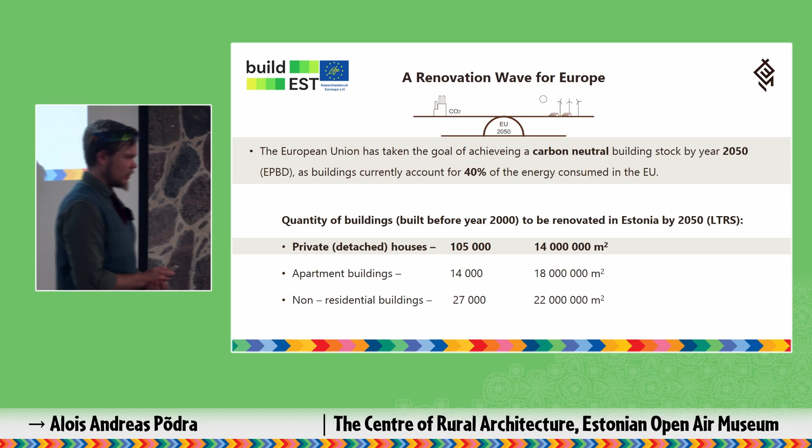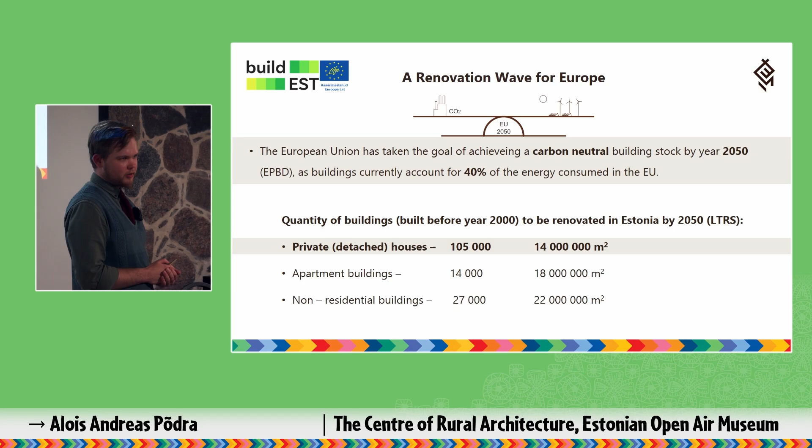First, a bit about energy efficiency. As we all know, this entire conference is framed somewhat around this. The European Union has taken the goal of achieving a carbon neutral building stock by year 2050, as buildings currently account for about 40% of the energy consumed in the EU. For this reason, each member state was asked to compile a long-term strategy for building renovation.

And these are the numbers laid out in the Estonian legislation. We see that private, or single family, or detached houses, however you want to call them - I will be referring to them as detached houses - have the lowest number in terms of total area of the building stock, but in absolute numbers it is several times larger, which is quite obvious here.

Which means that we have a lot of detached houses to renovate, and we have also considered that a number of buildings will be falling out of use, some are renovated, but the total number we have arrived at is 105,000 detached houses. My presentation was centered around non-listed buildings.

However, I will be going more in depth in terms of dwellings. So I will be leaving out buildings with a public function and buildings in more urban areas. I will be focusing more on detached housing in lower density areas.

So in Estonia, a renovated building ought to comply with minimum standards for energy efficiency, which in Estonia means energy class C, meaning the total yearly primary energy consumption per square meter needs to be between 185 and 140, depending on the size of the building. There are 3 different classes for detached houses.

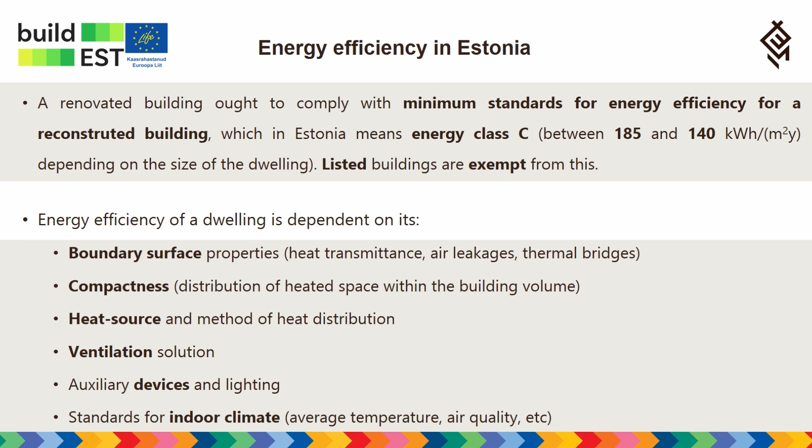We have its boundary surface properties, which affect its heat transmittance, air leakage, and thermal bridging. Its compactness - how the heated space is placed within the building volume. Is it placed all around the massing, or is it all clumped together?

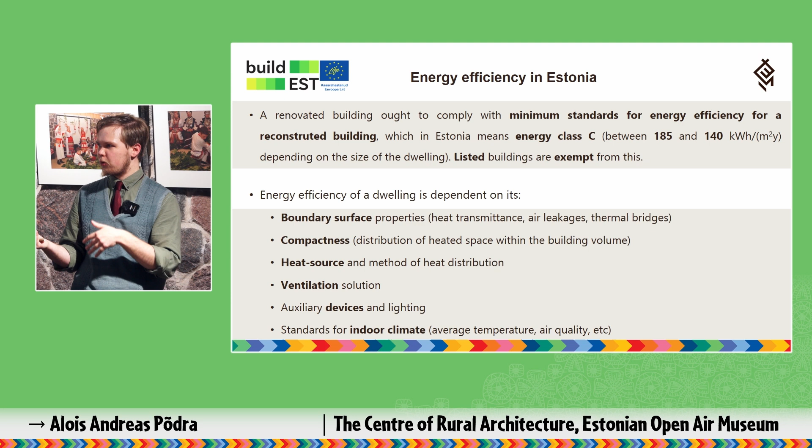The type of heat source, and how efficient it is. Its ventilation solution - is there a ventilation solution? Is the ventilation solution mechanical or natural? What types of auxiliary devices and lighting does the building use? How many of the devices are used and how efficient are they?

And what standards for indoor climate have we established? Are we satisfied with, let's say, 15 degrees as an indoor temperature during the winter months? Or do we require higher standards for this? And also that applies in terms of air exchange.

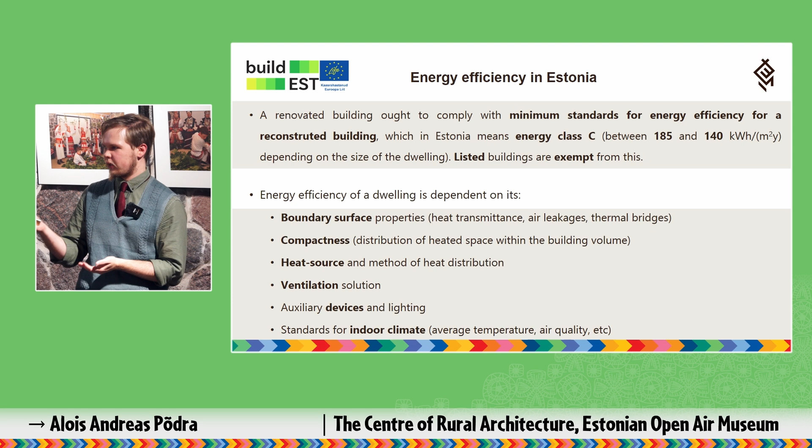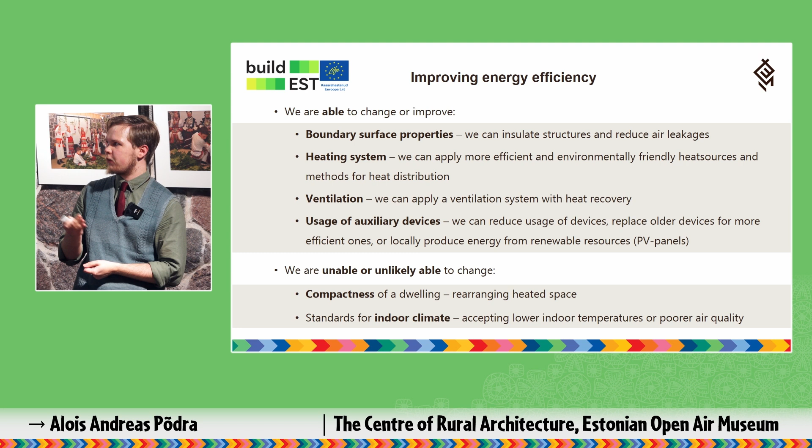So what can we do to improve the energy efficiency of a building? We can upgrade its boundary surface properties, meaning we can insulate them and reduce air leakages. We can upgrade the heating system, applying more efficient or environmentally friendly heat sources and more efficient methods of heat distribution.

Ventilation - we can apply a ventilation system with heat recovery, because if we need to reduce air leakages, that means any form of natural ventilation needs to be switched off, and all ventilation needs to be done mechanically. But that also gives us the opportunity to use heat recovery.

And the question of how many and what types of auxiliary devices do we use? Do we use more devices, less devices? Do we upgrade their efficiency? Do we replace older devices with more efficient ones? And can we produce energy locally from renewable resources, which is where photovoltaic panels come into play?

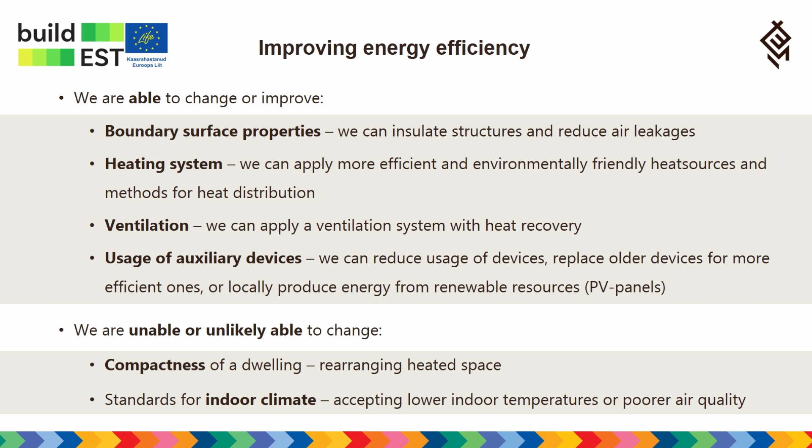What we can't, or are unlikely to change, is the compactness of our building - rearranging any heated space can be very costly and isn't really sensible in a building, usually if it's historic. And the standards for indoor climate are another area where we can't really make concessions - currently it has been established that we shouldn't make any concessions in terms of indoor climate.

We shouldn't accept lower indoor temperatures or poor air quality. However, there are points of discussion around this as well that can be had.

Now, we have looked at the energy performance side, but we also need to take into consideration the architectural quality of the renovation project, as that is not only an issue of aesthetics or heritage, but also has a quantifiable dimension in the building's life cycle.

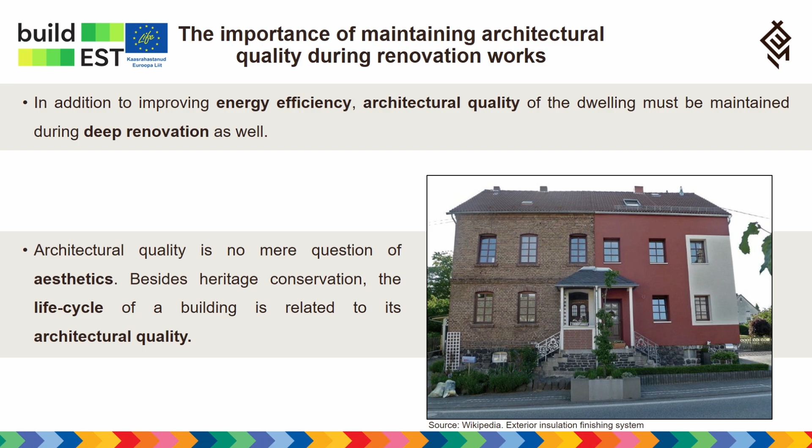So I would argue that if the renovation project begins by replacing the historical details and materials with relatively cheap modern products, they ignore the structural issues or use improper repair techniques. Sure, the renovation solutions might be fine for 20 to 30 years, but after that, the renovation will need to be renovated again.

The negative scenario is that when you're looking at the building, everything original has been lost. The building doesn't really look that good anymore. There's a lot of structural issues. And in the end, the worst scenario is when the homeowner starts to question, why should I renovate this building?

The worst scenario is when the real estate value of the plot is more profitable without the building than with it, meaning the owner is more motivated to demolish it and sell a clear plot to a developer than to renovate it. Improper renovation where the building loses its architectural character has an impact on the life cycle of the building, which has an impact on its carbon footprint as well.

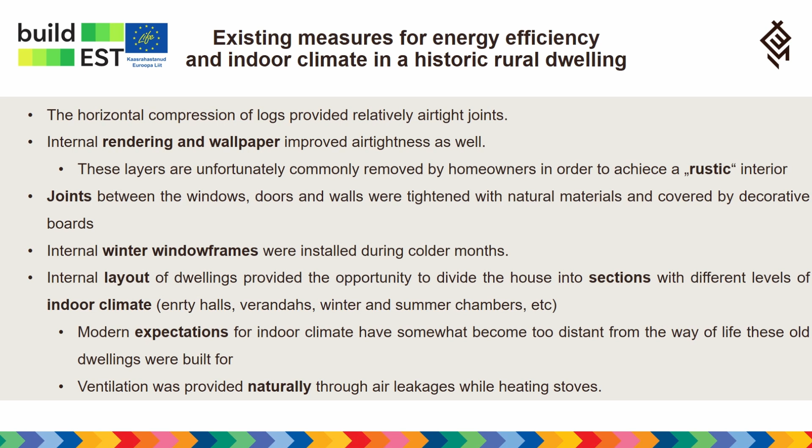This is, for example, any entry halls, verandas. For example, when in winter you open the door, it doesn't lead into a heated chamber right away. You have this sort of transitional spaces for entering the building, so that the heat doesn't escape out through the open doors.

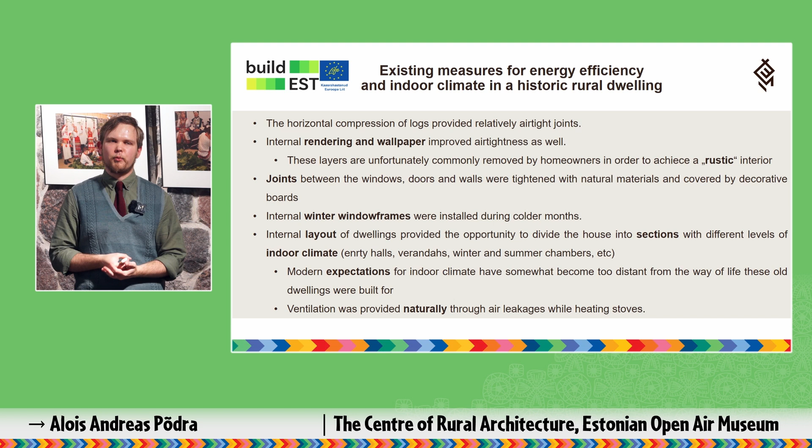And you have winter and summer rooms. Rooms that you heat during the winter, and then rooms that you do not heat, that you use only during the summer months. And also, the modern expectations for indoor climate have become somewhat distant from the way of life that these old dwellings were built for.

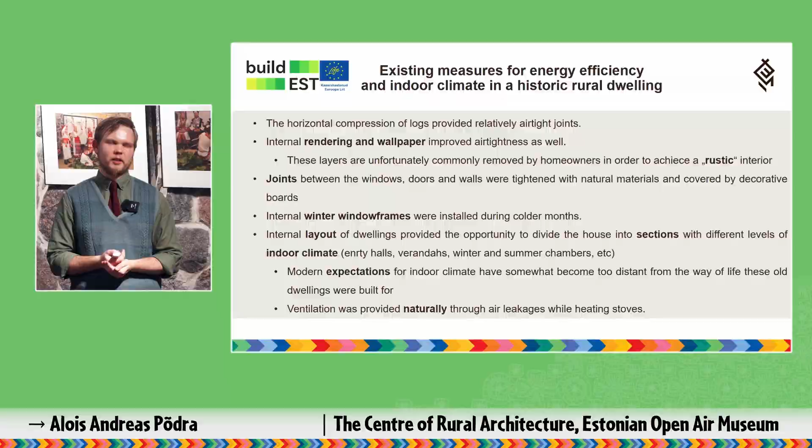Having low temperatures on the floor and putting on woolen socks and wearing an extra layer of sweaters was part of the way of life in these buildings. Unlike today's expectations that I want to walk barefoot in the house and I want 21 degrees everywhere. There is a gray area in how appropriate such requirements in a historic house actually are.

And also the aspect of ventilation was provided naturally through the air leakages in the windows, through any gaps in the doors, and it functioned thanks to heating stoves. So nowadays, when we seal the air leakages, we seal the windows, we use heat pumps, we arrive at the problem that the building isn't ventilated anymore, which leads us to the requirement of using mechanical ventilation.

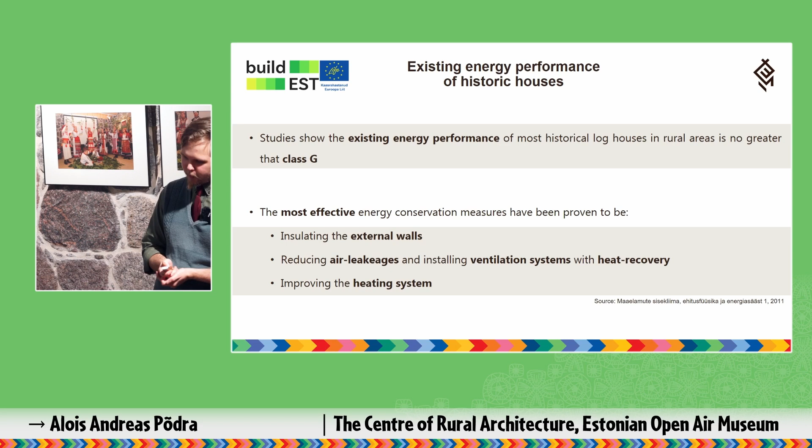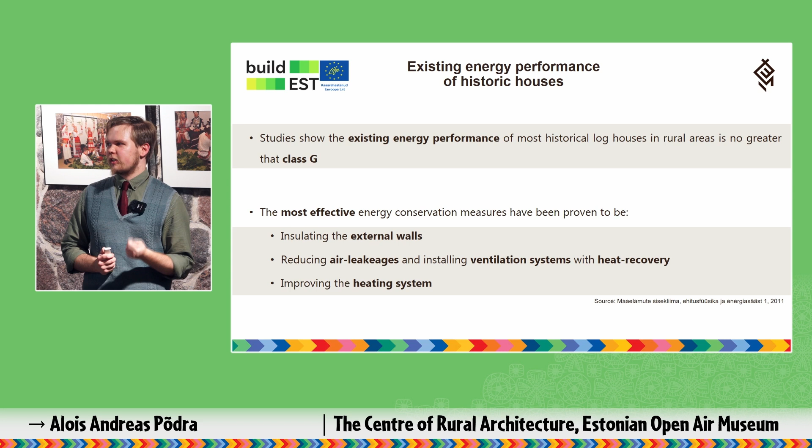In terms of the measured energy performance of such historical dwellings, unfortunately, while we can apply these sort of passive or energy conservation measures, the energy class does not go beyond class G. Studies show that the most effective measures are insulating the external walls, installing ventilation systems with heat recovery, and improving heating systems.

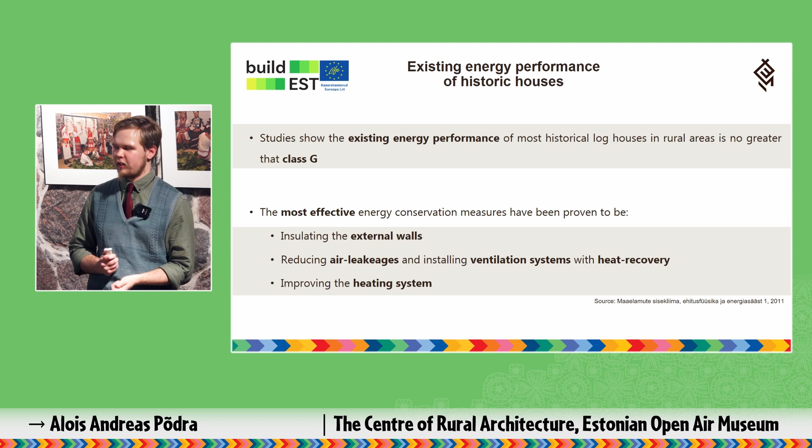Insulating the external walls is among the most controversial energy conservation measures, because there's the danger of defacing the facade with the external insulation. However, we can't really get over the fact that it is among the most efficient energy conservation measures.

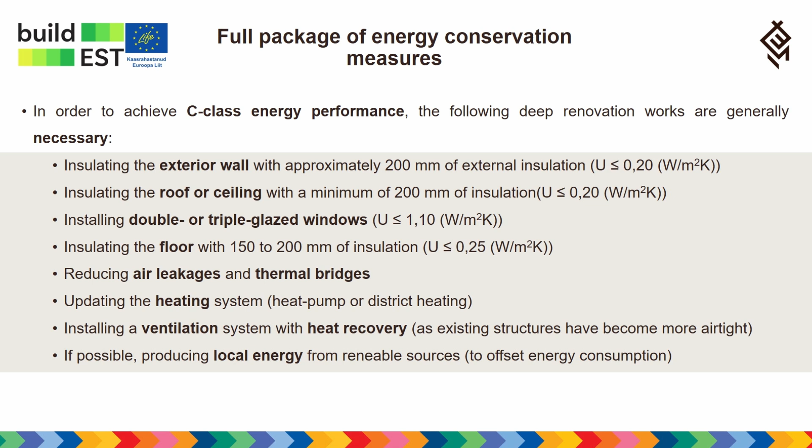And the question of internal versus external insulation: experience shows that any more than 5 centimeters of interior insulation can be problematic in terms of moisture. So it is possible that perhaps with calculations and moisture barriers and ventilation, a little bit more is possible, but the 200 millimeters that you generally need for the required energy class is not possible when insulating the interior.

However, external insulation is safe in terms of any condensation and mold, and bacterial and fungal growth.

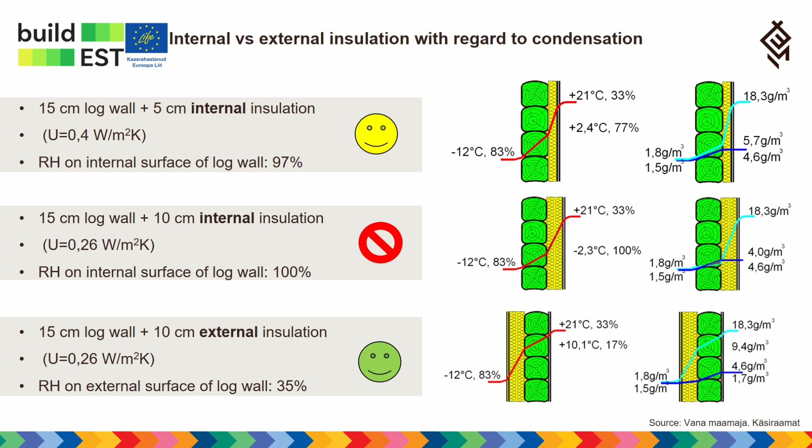And there have been studies where we have an actually listed or protected building, and there have been explorations: can we somehow maintain the proportion of the building pre-renovation while adding insulation with equal means throughout the entire dwelling? For this example building in Võru, they did achieve this - the external silhouette of the building remained exactly the same, although the added insulation thicknesses are also up to the required amount.

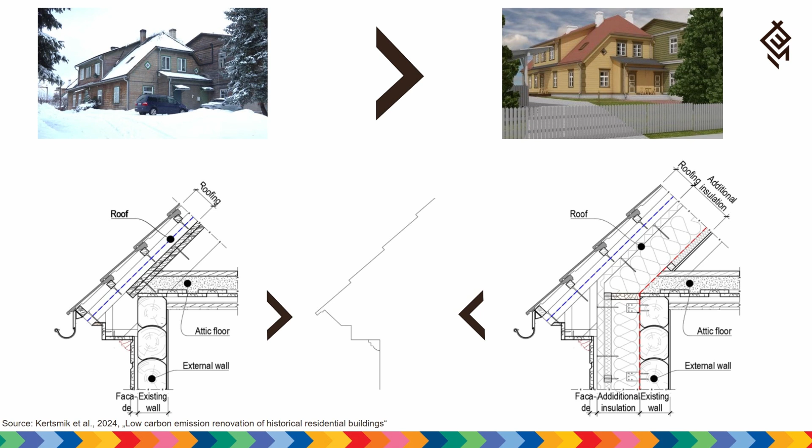So experience shows that if it works on listed buildings, there is potential that we can potentially apply it for unlisted buildings as well. However, we can't underestimate the cost of such a renovation project.

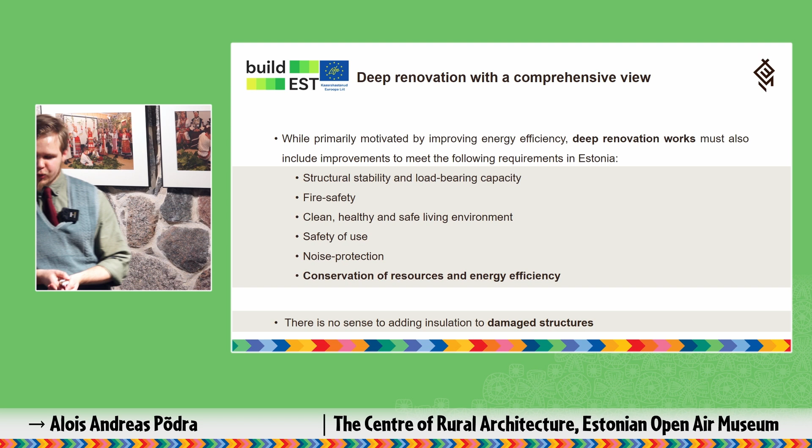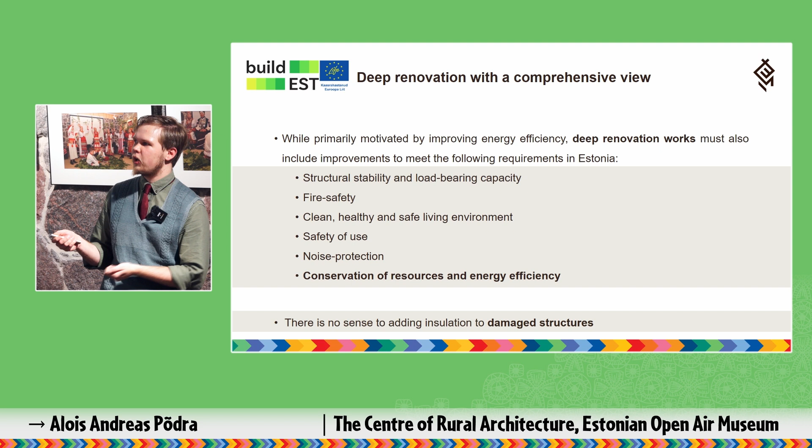Renovation works, while they may be motivated by raising the energy performance, deep renovation works must also include improvements to meet the following requirements in Estonia. We start with structural stability and load-bearing capacity, fire safety, having a clean, healthy and safe living environment, safety of use, noise protection, and then number 6 is conservation of resources and energy efficiency - which means that works on energy efficiency should also ensure that the structure or dwelling as a whole also meets these requirements, which makes the renovation project even more complicated.

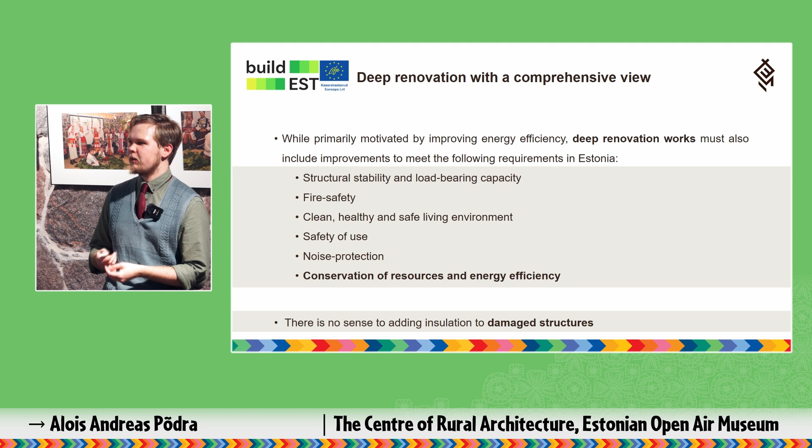And the main idea is that there's no sense in adding insulation to damaged structures, which means that we also need insights into the technical condition of the housing stock in Estonia, before we talk about any energy conservation measures and adding insulation.

So we have done several studies in Estonia to explore this question, to understand what homeowners are currently doing, what they have been doing, what they are planning to do, and what is their mindset. I will be introducing roughly 3 studies, or different aspects of each study.

The first study had a fieldwork method where a number of buildings in the Esna and Kareda region in Estonia were inventoried. There were 2 types of buildings generally: log houses built between 1900 and 1939, and then Soviet era, more modernized architecture from the 1970s to the 1980s, built from aerated concrete. So we had these two different building typologies that we were able to compare.

The rundown of the different building types: log buildings, we had 29 detached houses, 6 more archaic barn dwellings, 2 modernized barn dwellings, and 73% of these buildings had permanent residents and were used year-round, which means insulation and energy conservation measures were very important.

However, 27% were in use for limited periods, for example as holiday homes. And for those owners, renovation generally entailed was described more as repair and maintenance rather than adding insulation.

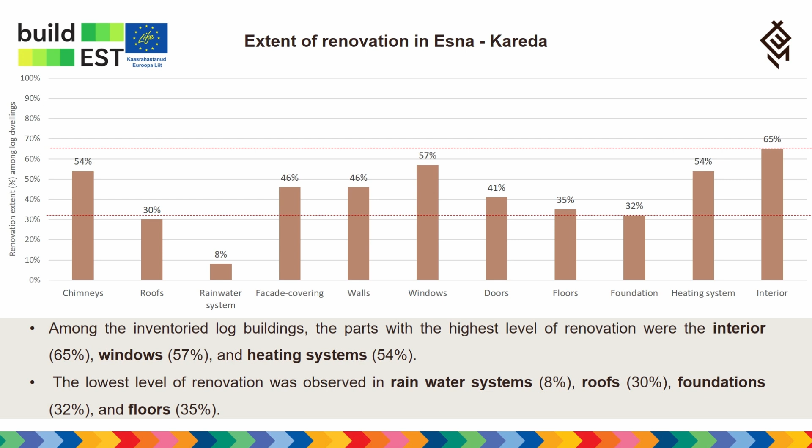There's probably this sort of trend in terms of renovation practice: insulate the walls and the windows and the roof, and replace the heating system. Perhaps renovation of foundations is just not that common a topic of discussion between homeowners.

We also noticed that renovation is generally done in stages, meaning homeowners phase out their renovation works into manageable steps they can imagine. They do it by building section, by room, by facade, sometimes even window by window. And the reason windows, the interior and heating systems are the most common is that their poor condition is likely the most noticeable on an everyday basis.

If you live inside a room, you notice if the wallpaper is poor, you notice if the window has a draft, you notice if your heating system is poor. So this is likely why these are the most commonly renovated aspects of the building.

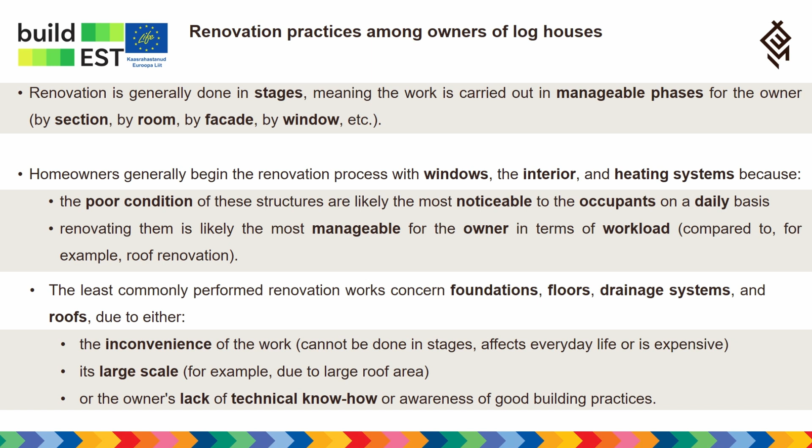However, we know the actual energy savings from renovating a window are actually not that noticeable. In terms of thermal comfort, sure, you might have less drafts during winter, but in terms of total energy performance, it might not be that great. It depends on the building, how much window area it has, how poor the original windows are, but it is not among the most efficient energy conservation measures.

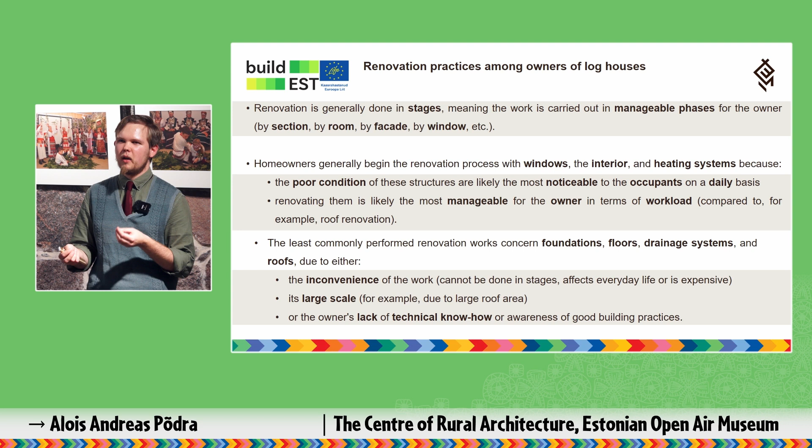And doing the interior is just aesthetics, basically. Again, while the foundations, floors, and roofs are the least done, the work is likely very inconvenient. You can't really replace a roof in stages - well, you can, but it's difficult. And renovating floors, you can't really live inside the room if you need to replace it. So if you don't have enough space for the family to move out of one room into another, then it might not be possible to renovate the floor.

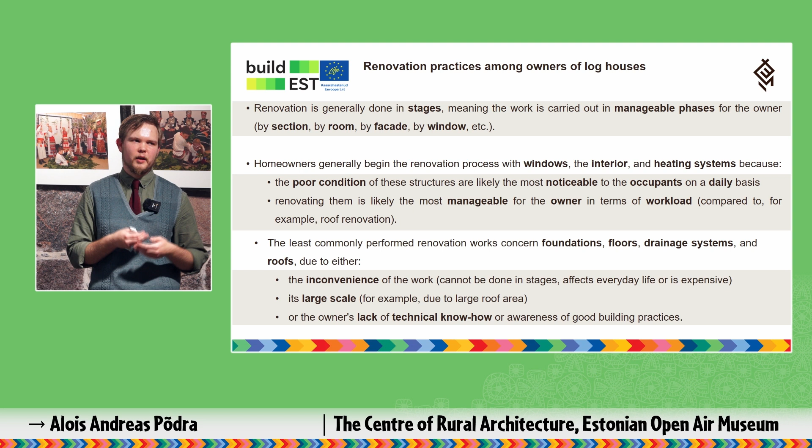Also, the owner's lack of technical know-how or awareness of good building practices is an issue. There's very much this culture of self-building, or consulting relatives, friends, neighbors, and building forums online about which kinds of energy renovation measures are the most proper and which materials to use. There aren't really that many technical, trustworthy information sources available today yet in Estonia. We are improving that, but a lack of technical know-how is a real issue.

And when comparing it to the other building typology, the aerated concrete buildings from the 1970s and onwards, I can say that their technical condition was better.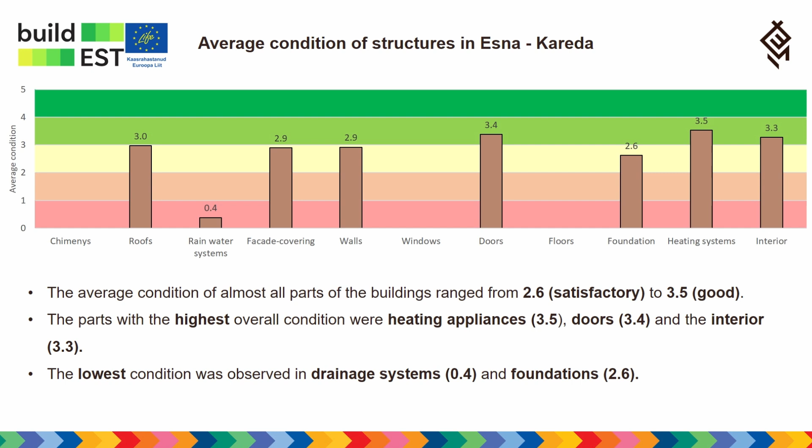In terms of log buildings, the highest overall condition was found in structures that were most commonly renovated: heating appliances, the interior, and doors. The lowest condition was noticed for the least renovated structures, again foundations and drainage systems.

Also comparing unrenovated and renovated average conditions, we see that the condition does improve. However, no average condition reaches the optimal state. And again, comparing to aerated concrete structures, they were much more closer to the perfect score than these historic log dwellings.

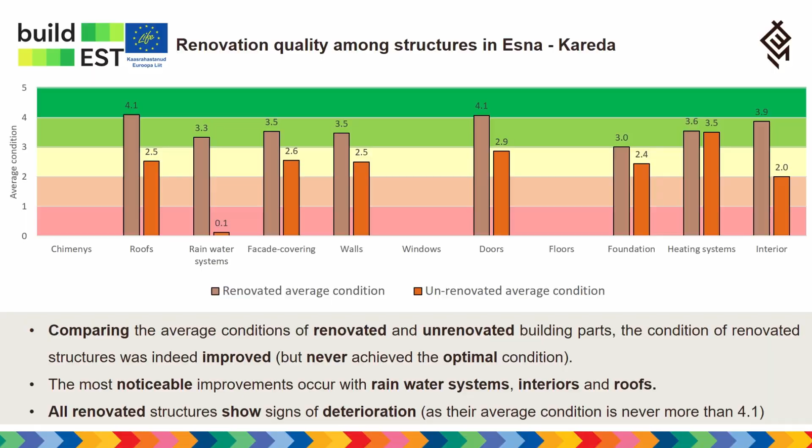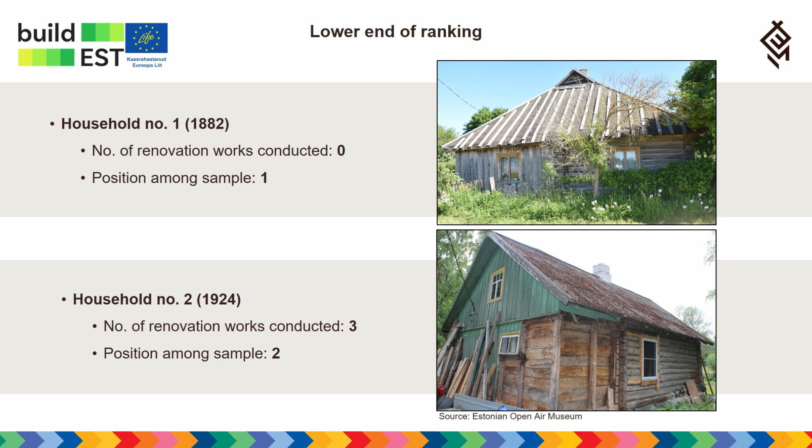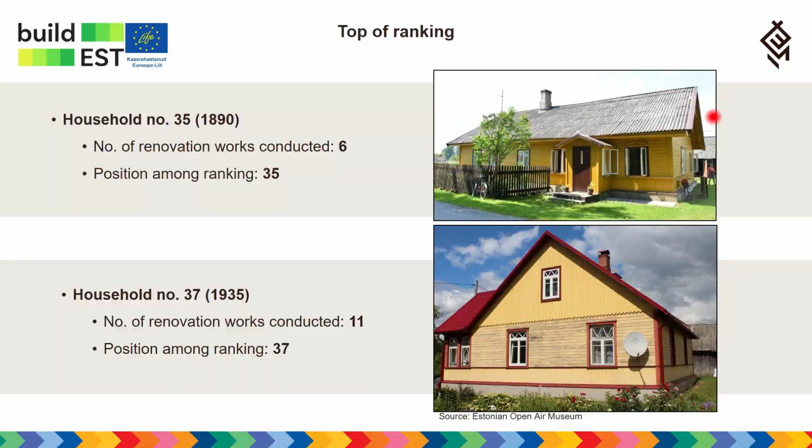The top of the ranking was interesting. We have 2 buildings with a comparable total score, 35 and 37, but the number of conducted renovation works differed - doubled, in fact. This building had 11 structures renovated, this one only 6, but the technical condition was basically the same. This led us to a conclusion: maintenance, preserving existing structures with yearly upkeep, is actually comparable to a condition where the building was allowed to deteriorate and then improved through renovation works.

But this is only in terms of technical condition, not energy performance. This homeowner likely achieved a good condition with a smaller total investment compared to the other building, which again highlights the importance of maintenance.

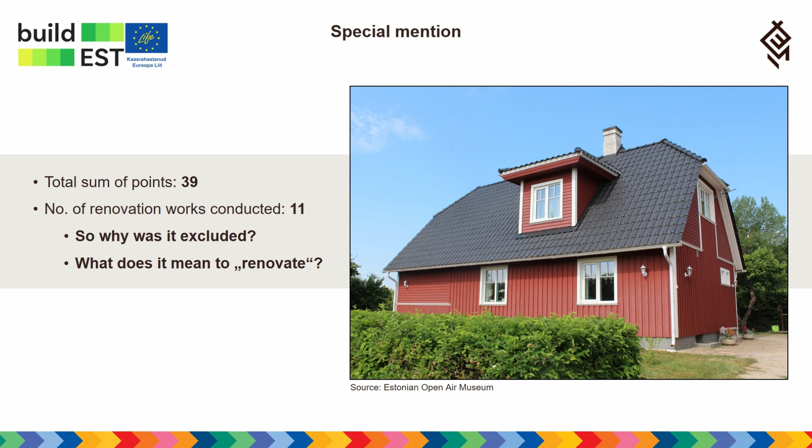One special mention had the highest score and highest number of renovation works, but it was excluded from the sample. Why? Discussions with the owner revealed that for them, renovation meant demolishing the entire thing down to the foundation and building a replica. So technically we can't call this a renovation, but it's how certain homeowners interpret the renovation process.

We also see this among developers and people who have the finances to build an entirely new building - renovating faulty structures while improving energy performance and architectural appearance becomes so costly that demolishing the structure becomes easier. Again, it comes down to maintenance, because in terms of total cost, if a building is not maintained and improvements are needed everywhere, this demolition scenario becomes far more likely for the homeowner. And this is not what we're actually looking for in the renovation wave.

And in Esna Kareda, we also looked at the amount of preservation of cultural heritage: inventorying surviving original material, the form and massing of the building, and the architectural details. We noticed that in terms of material and the form of the building, it was relatively okay. However, details are the most vulnerable of these three categories, because they're the easiest to remove, the easiest to replace, and the least likely to be placed back onto the facade once any external insulation has been placed.

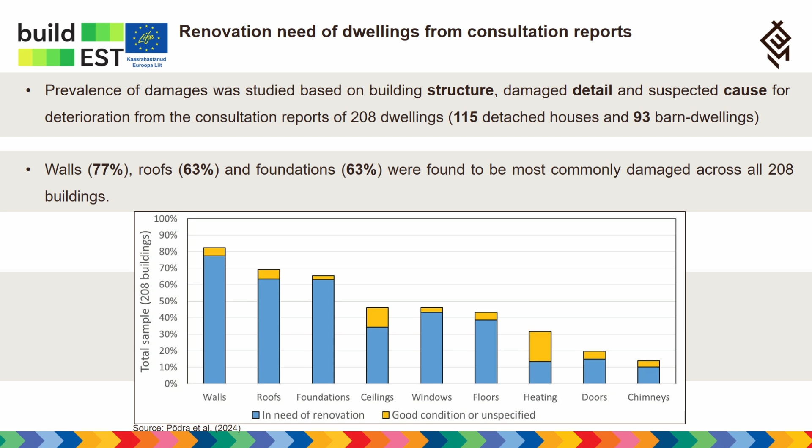Sometimes damage wasn't even described, because the reports also highlight if a structure was in good condition, or if it had specific heritage value that the homeowner ought to preserve during the renovation process.

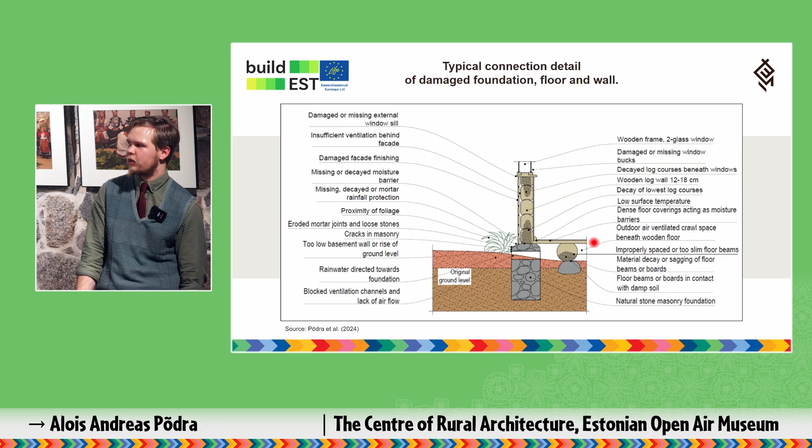We also mapped out the different damage types. As you can see, we have a simple junction between the foundation, the floor, and the log wall, also a window, and the list of damages or potential risky solutions is very long.

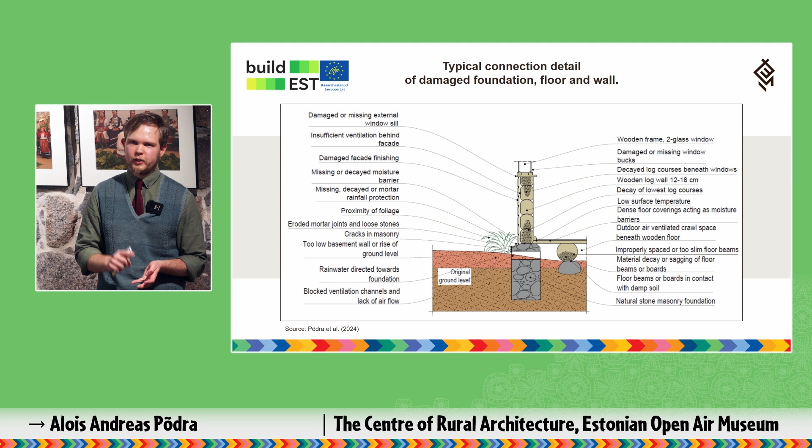The potential for damage transfer was very high. You have a damaged windowsill that leads to a damaged log wall. You have a leak in the roof, leading to a damaged roof rafter, a damaged ceiling beam, then a damaged floor, etc.

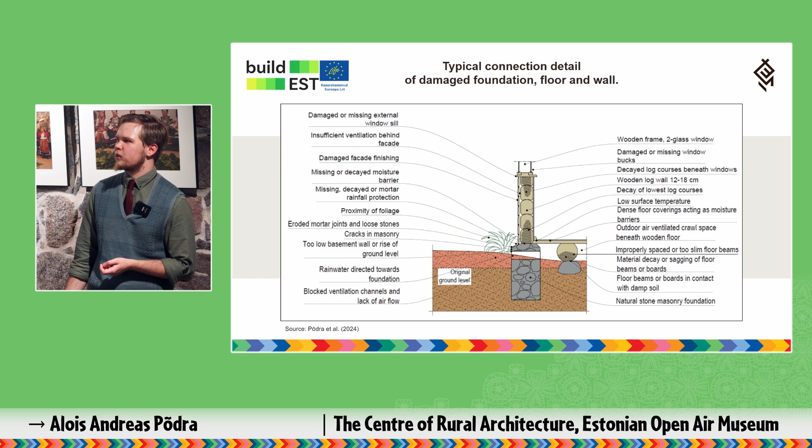Even small things, like foliage against the foundation, or a ground level that has risen over the decades, all lead to problems under the floor and in the log wall, increasing the investment the homeowner will need to make in the renovation. We can talk about insulation, but all these potential damages related to maintenance will also need to be fixed during renovation, increasing the original investment and making the process exponentially more difficult for homeowners.

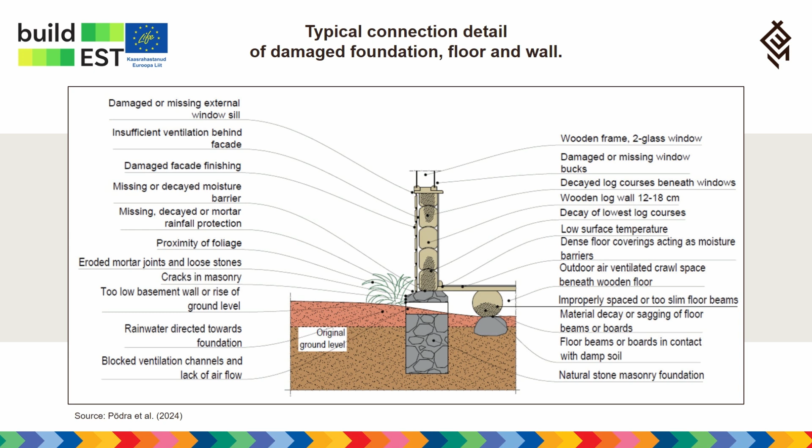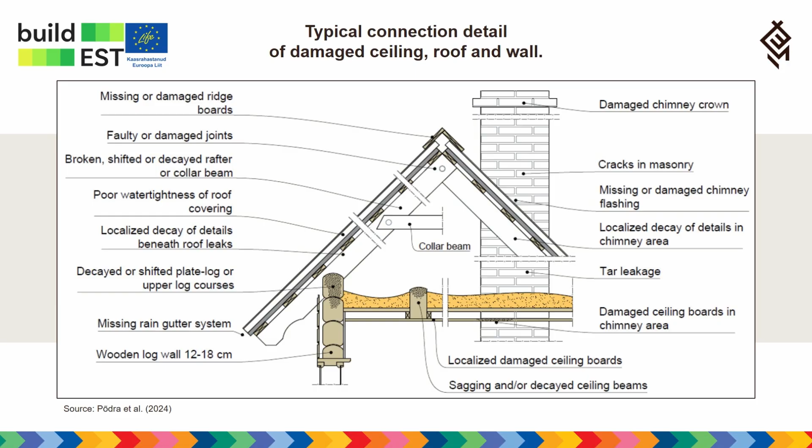Everything that can go wrong in a roof: missing or damaged ridge boards, faulty joints of the rafters, broken collar beams, poor water tightness of the roof covering, localized decay beneath roof leaks, shifted plate logs, missing rain gutter systems. There are many points where damage can creep in and create a lot of problems that will need to be fixed.

Our third study, in terms of heritage, wanted to see how homeowners view their own situation - what is their motivation to renovate, how have they renovated their houses, etc. That study is very much related to Petra's presentation of the study we did with Kantar Emor.

The total sample of buildings included 98,000 homes in Estonia, and we got 978 responses, a nice 1% representation. It was done as a questionnaire, either online or by phone. We measured many technical aspects, such as how they evaluate the indoor climate, how they heat their homes, and what renovation measures they've used.

As I've already broken that down in this presentation, I didn't want to go over that again. This time is limited, but I wanted to highlight this.

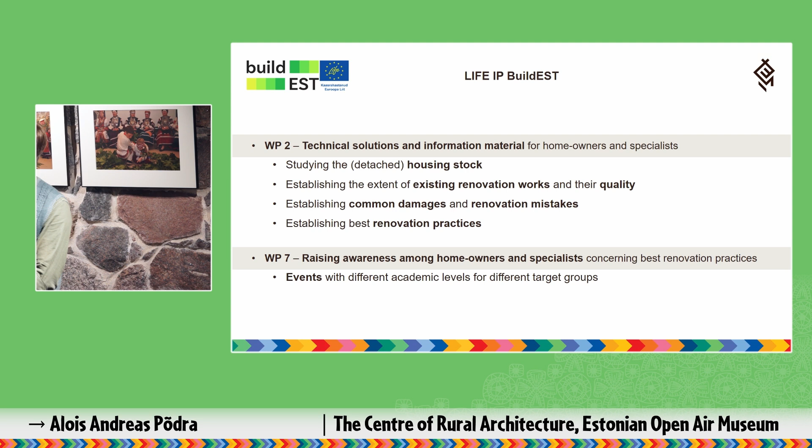Some words about the BuildEST project. The Open Air Museum is part of two work packages: developing technical solutions and information material for both homeowners and specialists. Part of this work includes studying the detached housing stock, establishing the extent of existing renovation works and their quality, identifying common damages and renovation mistakes, establishing best renovation practices, and raising awareness among homeowners and specialists through events such as this one.

More on work package 2—the previous studies I showed were all part of that work package. When developing these technical solutions, I've provided several principles that might potentially be taken into account when these solutions are established.

For example, primarily focusing on external insulation or replacing old insulation with more efficient materials, maintaining architectural proportions according to building type—regardless of whether it's protected now or whether this type of architecture might deserve preservation in the future—preserving historical details, trying to nudge the construction market to make it easier for homeowners to produce or find replicas, and recommending durable and accessible renovation solutions that are also historically appropriate to the building type and original construction material.

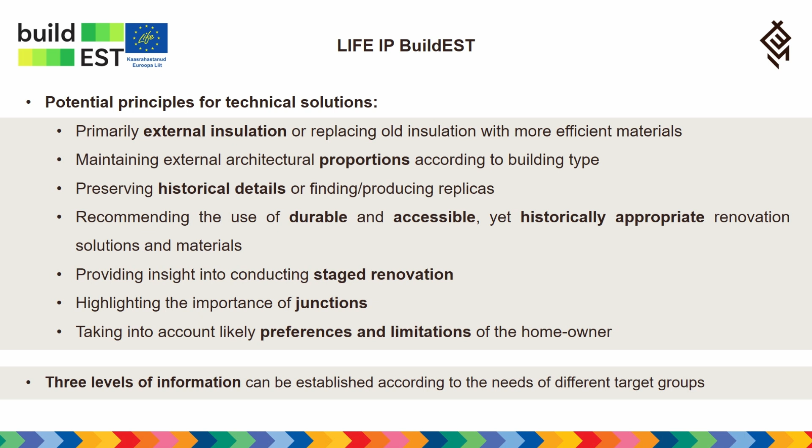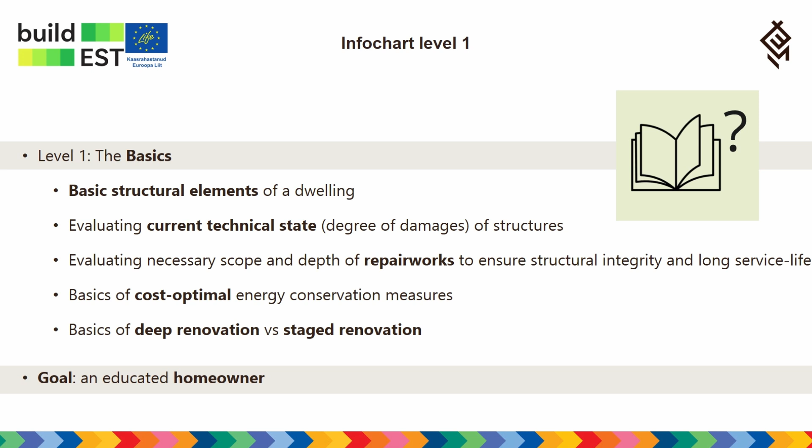Taking into account the preferences and likely limitations of the homeowner, we have established 3 levels of information. First, the information material. We start with the basics, the basic structural elements of a building, how to evaluate current technical state, how to evaluate the necessary scope and depth of repair works, what are the most cost optimal energy conservation measures, and basics of deep renovation versus staged renovation.

This is to eliminate this first feeling of confusion that homeowners might have. So the homeowner might not yet be sure which types of renovation solutions to order, but they know the technical terms, and basically they know how to discuss renovation solutions. They know how to discuss with the market, basically. So the goal is to have a more educated homeowner.

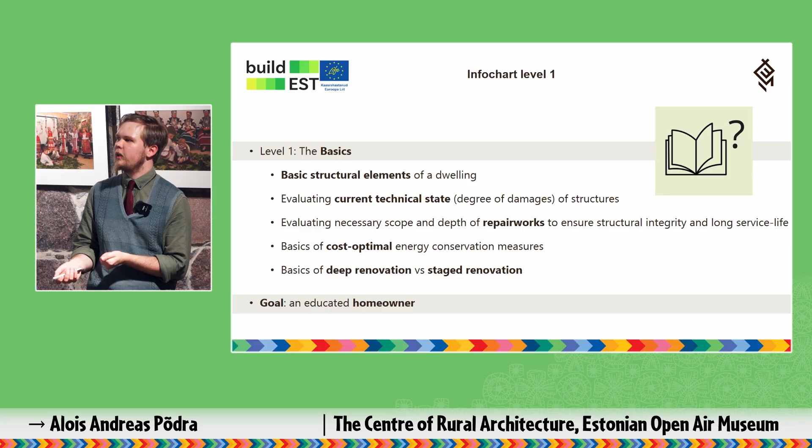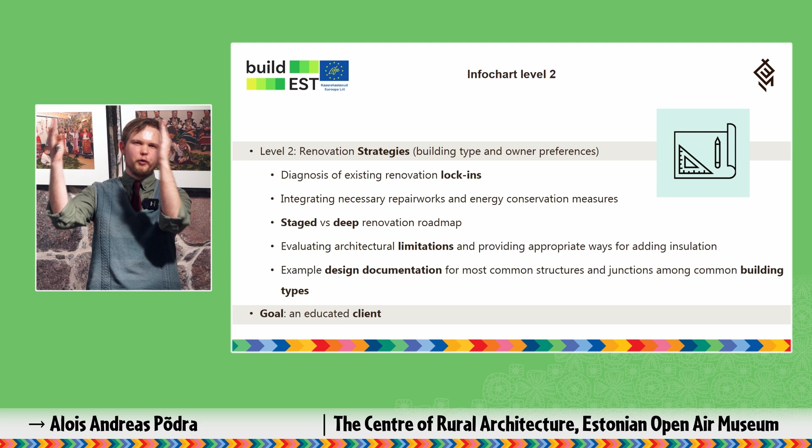However, if it's aimed at specialists, they can skip the first level, and we have level 2. These are renovation strategies by building type and by owner preferences. So these are specific renovation junctions and drawings, which first begin at an elementary level of saying that, okay, we add insulation to the roof, we add it to the wall, and then do you have any lock-in effects? Let's say the roof covering is already renovated, you can't really remove it anymore, so you need to add the insulation from indoors, or it might not even be possible.

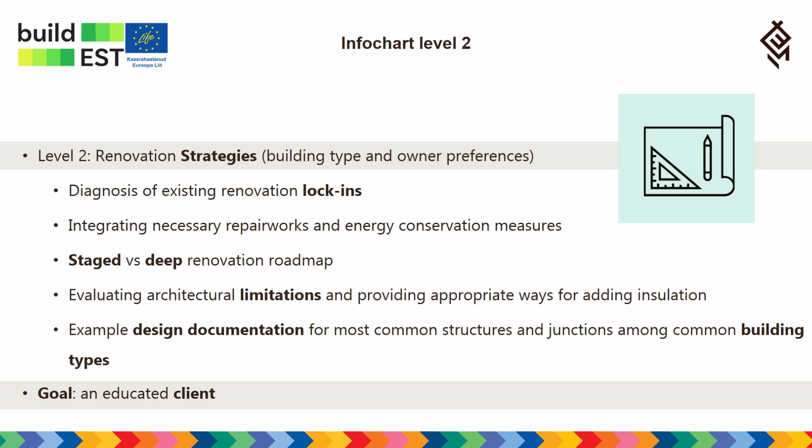How to establish what are your limitations, what is your renovation motivation, and which solutions are most appropriate. So this would give you an educated client. They already know how to speak, they already know where to place insulation, whether it's external or internal, which kinds of solutions they need, and they can already discuss with designers.

So this is like an example of a design documentation that would also be included with these example drawings, where we try to maintain the original proportions as much as possible, and any limitations that the homeowner might have. For example, this is a...

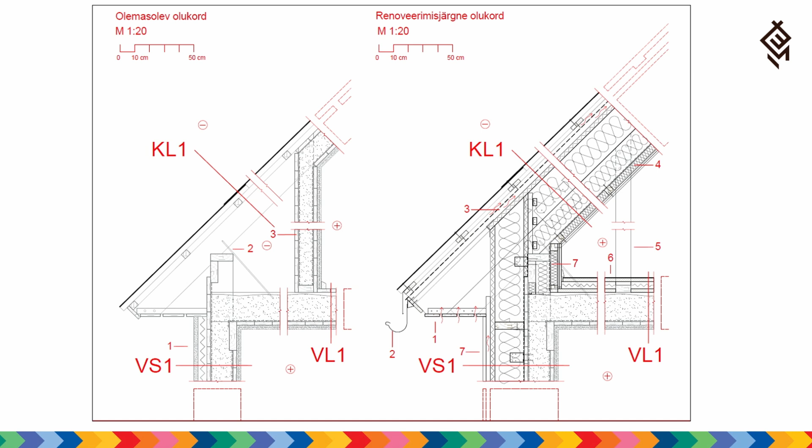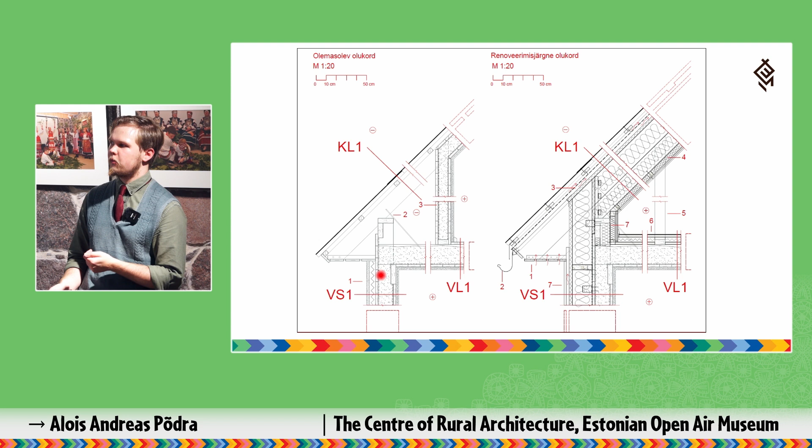Frame structure with sawdust insulation between the framing, and let's say that the homeowner doesn't want to take it apart from the interior side. They only want to insulate the outdoors, despite the fact that there is a potential of removing this old insulation and replacing it with more efficient insulation. But okay, let's say this is the solution the homeowner wants to have. This is a potential solution of how to do it.

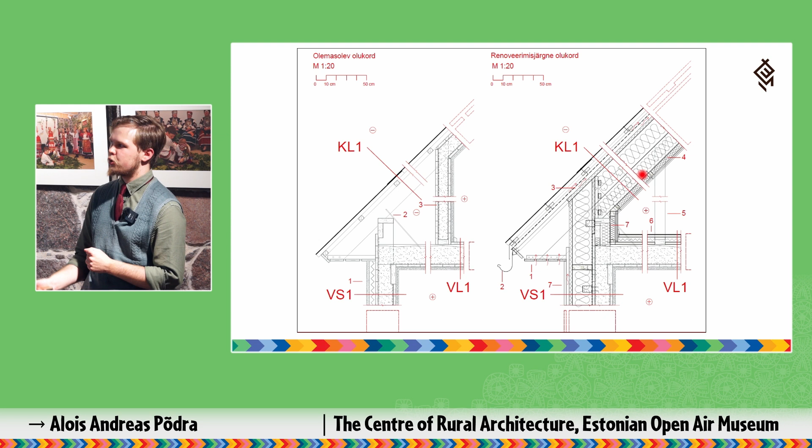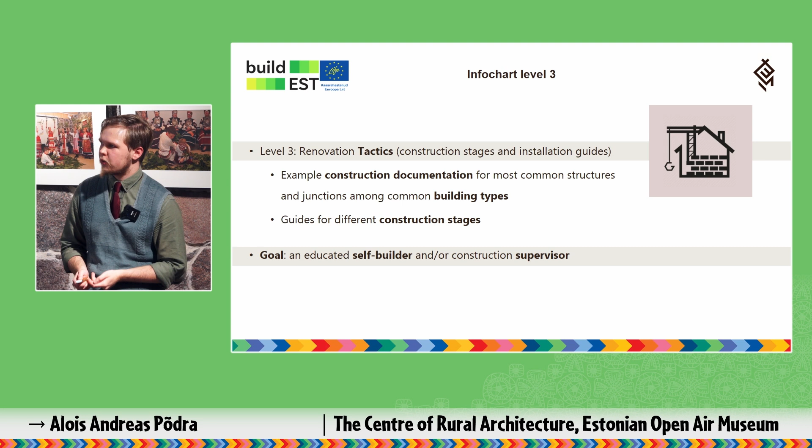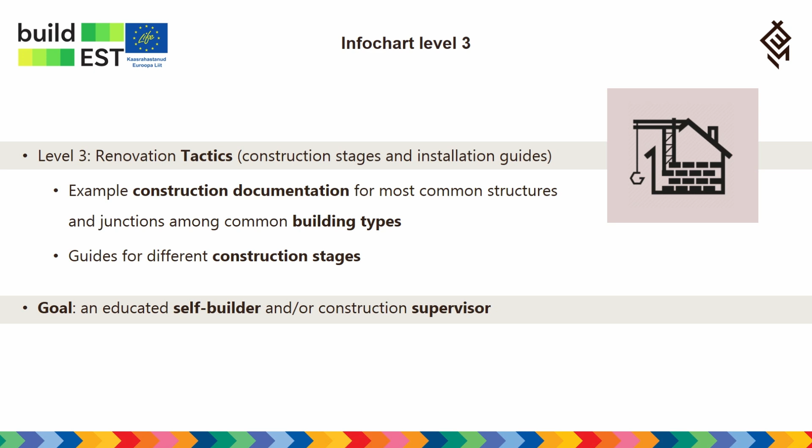And level 3, renovation tactics. Example construction documentation for common structures and junctions among common building types. Now this says exactly in which order to place any materials, how to provide air tightness, how to install the different measures, and this is more aimed at the self-builder, or to give the homeowner a potential of being able to act as a construction supervisor, to understand what the builders are doing, even if they themselves are not doing it.

And in the end, all of this hopefully might end up as part of the Building Renovation Passport, which is a concept recommended by the European Commission, where existing energy performance certificates are developed into a sort of logbook and roadmap, potentially an online module, where building data is stored in the logbook, and then this provides us a basis for establishing the renovation roadmap with exact renovation stages.

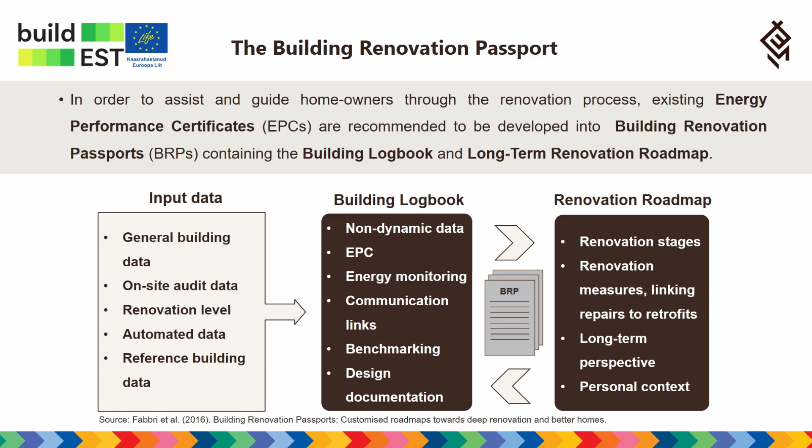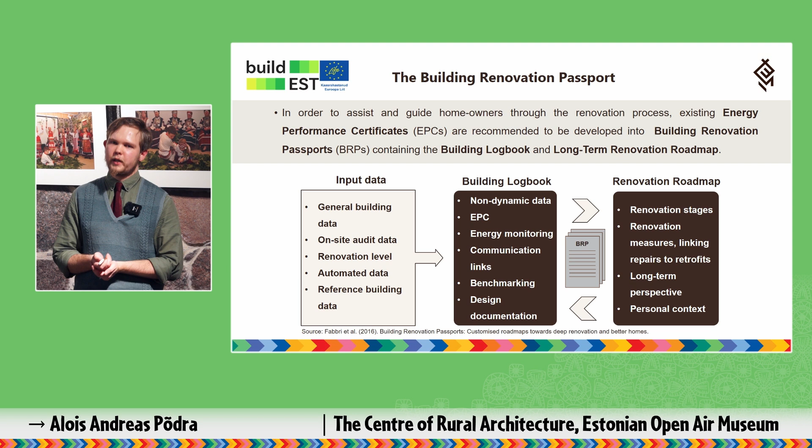What is the priority of each work? What is the size of the investment? Which solutions to use in which stages, etc. This is slowly in development, but this is the future where renovation advice hopefully will end up in Estonia. Thank you.

That was amazing, and there's a lot there. I think that database, I don't know of another. You guys are so amazing that you maybe all have them, but I think that's something would be very interesting. But the one thing of it that I noticed leads back to the real red flag, which is the rainwater goods. That is a terrifying statistic, because the single best and most important thing anyone can do with a building is make sure the rainwater is handled properly, especially because we're talking climate change.

That's got to be the priority. So one of the things that really worries me, for instance, with work on the building facade is where you lose the water shedding detailing. And a lot of what people think of as decoration isn't. So what can we do? Because do you record in that database the rainwater goods? You mean like the rainwater system that drains the building?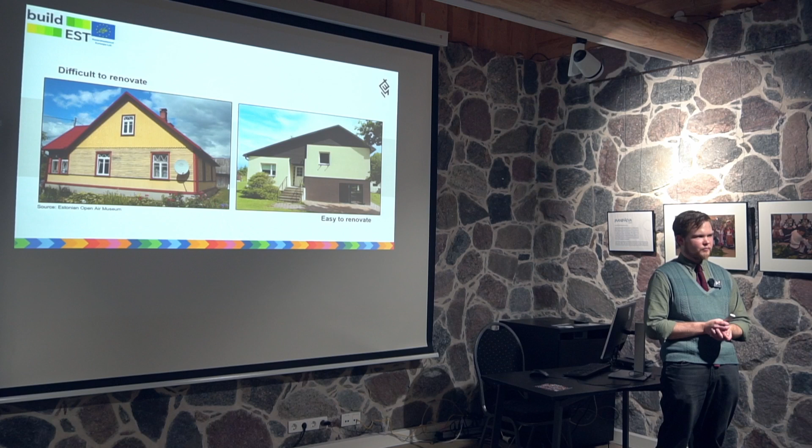We did a study about changes in detached houses, and I will use detached houses now. We saw that the modern buildings, it was actually more difficult to renovate them without losing their original character than the buildings from the 1910s, 20s and so on. When you come into this functionalistic architecture, it is much easier to destroy the character of the building than the older ones, which can be changed much more before you see it. So I thought that was really interesting, and I just wanted to ask if you have thought about that in your study.

I understand, yeah, I see what you mean. I think it all goes down to building type and architectural style.

I believe that in the 30s functionalist architecture, the question of proportion is much more subtle and much easier to ruin. However, this example is something different than what you might be describing, because this is a mass-produced dwelling. In that sense, renovating this building is somewhat closer to renovating a concrete block apartment building in Estonia. You can copy-paste the solutions much easier compared to this kind of dwelling that needs a much more tailored approach. So what you might be describing is placed somewhat in the middle, perhaps.

This building, when you compare it before and after, is essentially the same. You get these small weird nooks where the placement of the insulation was perhaps not completely thought through, but I'm pretty sure everyone would agree, whoever knows what type of building this is, that the character is completely preserved here, 100%.